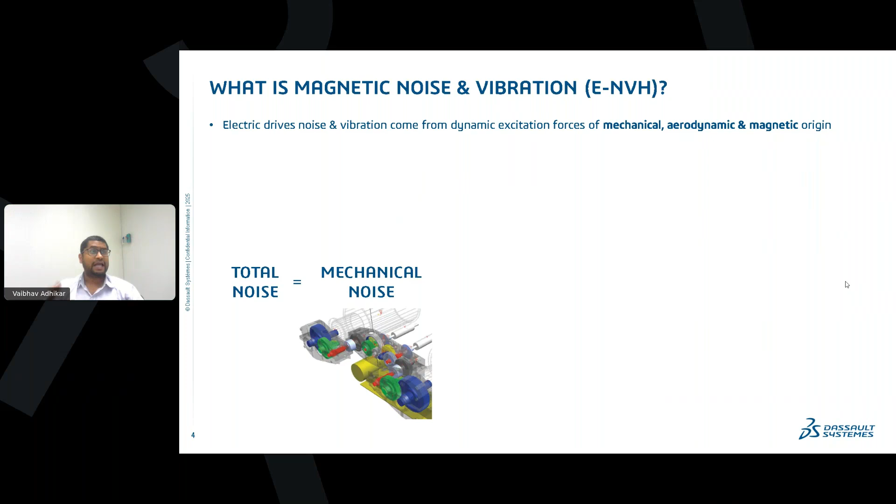So what exactly is the e-NVH? What we observe physically is the total noise. But I can decompose this total noise into three different components. The first component could be a mechanical noise, maybe because of the structural interaction. You can see a gearbox can be one of the examples. Okay. Another component could be the fluid noise. Here you have the structural and the air interaction, so the fluid as well as the solid interaction is a crucial part to get the noise level. And the third component we might ignore many times, and it is not physically realizable. So that is the magnetic noise.

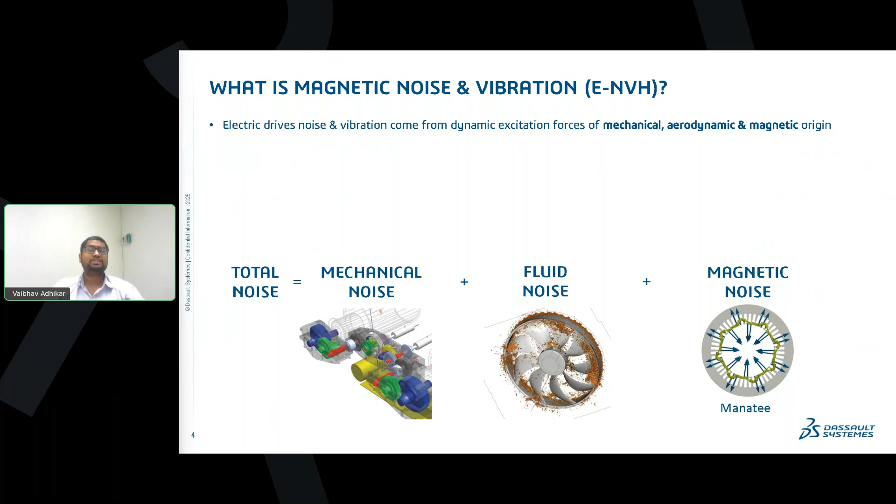So magnetic noise basically comes from the forces, magnetomotive forces, and these magnetic forces are basically induced by the magnetic fields, and these magnetic fields may be present in the coils or in the magnets, which are again an inherent part of your motor.

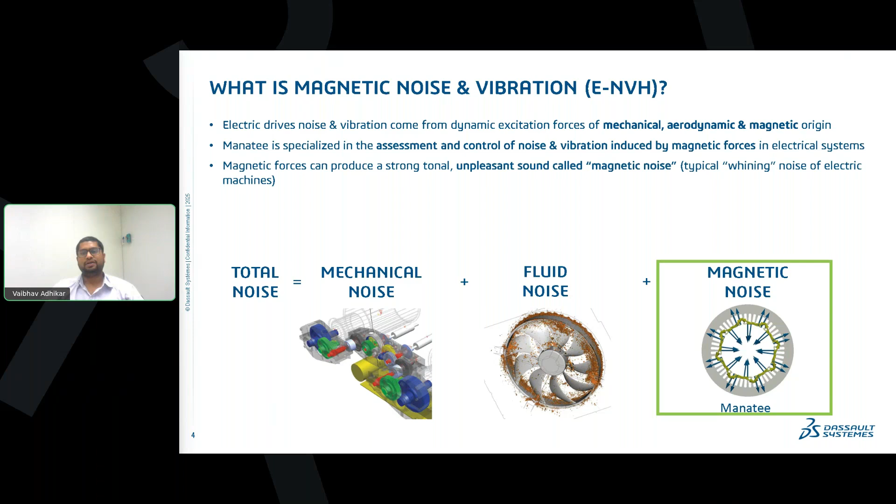So if you are dealing with a motor or generator, any rotary machine system, magnetic noise will always be there because of the magnetic forces, and those magnetic forces basically get induced by the magnetic fields. And Manatee is a very specialized tool to assess this magnetic noise and the vibration which is basically induced by the magnetic forces. These magnetic forces can produce a strong tonal, unpleasant sound level, something we also call magnetic noise.

So, having said so, why do we really care about the magnetic noise, which in automotive terminology is also known as e-NVH? Of course, the first answer is the end user expects the electrical system to be as silent as possible. However, the magnetic noise can be louder than your aerodynamic noise or your mechanical noise, and there are multiple reasons we want to reduce this noise. If I list down these reasons, one could be fulfilling the standard requirements. Another could be you may want your product to be different from the competitors, or you may want the product to sound better compared to your competitors.

You also expect that the product should not get rejected during any subjective testing, as the product is lifelong. Its lifetime should not be reduced because of these vibrations. And of course the product must not disturb any surrounding life. So there are multiple reasons why we need to address and mitigate the e-NVH noise.

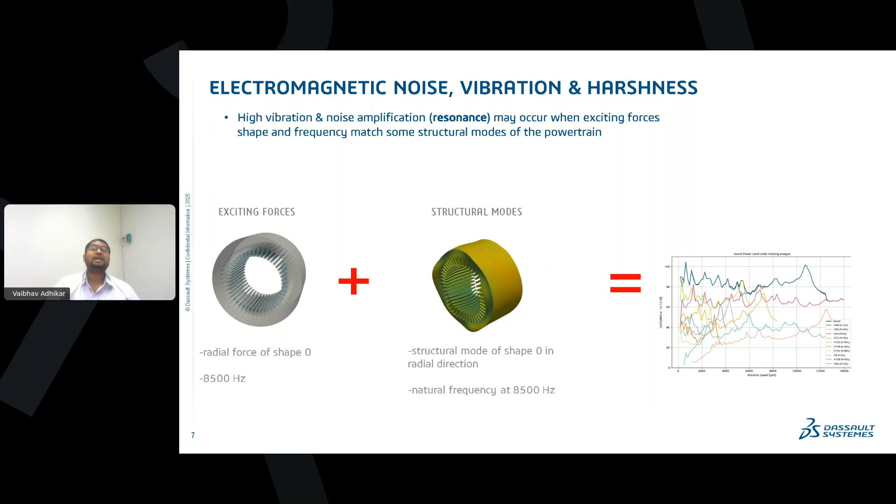Now, on top of it, we also have the structure. This structure will also have its fundamental modal shape. Here you can see another structural mode, and it is also expanding and compressing in the radial direction, at the same frequency, 8.5 kilohertz. So if both these conditions are matched, that results in resonance. I will repeat: if the mode shape from the electrical point of view and from the structural point of view match along with the frequency, that's where the resonance condition gets satisfied, and you will see a sudden spike in your noise levels. That is something we definitely need to identify, and we need to resolve that resonance.

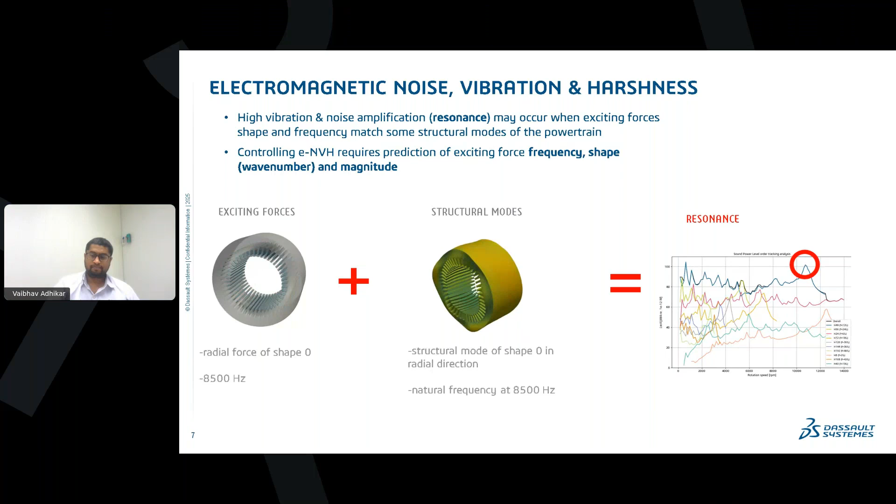Now, from this resonance concept, we came to know that in order to control your e-NVH noise, we should have control over, or be able to predict, the force frequency, the shape, as well as the magnitude of it. And let's see how Manatee can help in this.

Now, you might have observed that this is a multiphysics process where the electromagnetic forces as well as the structural motion combine, giving you the e-NVH noise. So it is a multiphysics process, and here not only the electrical engineers but also the control engineers, mechanical engineers, or the NVH engineers work together to address this problem.

Maybe the control engineers or electrical engineers will work at the excitation level, whereas the mechanical engineers and the NVH engineers work at the transfer path, addressing the structural or the acoustic issue. So all needs to be solved in a single user interface, and that's what Manatee is providing.

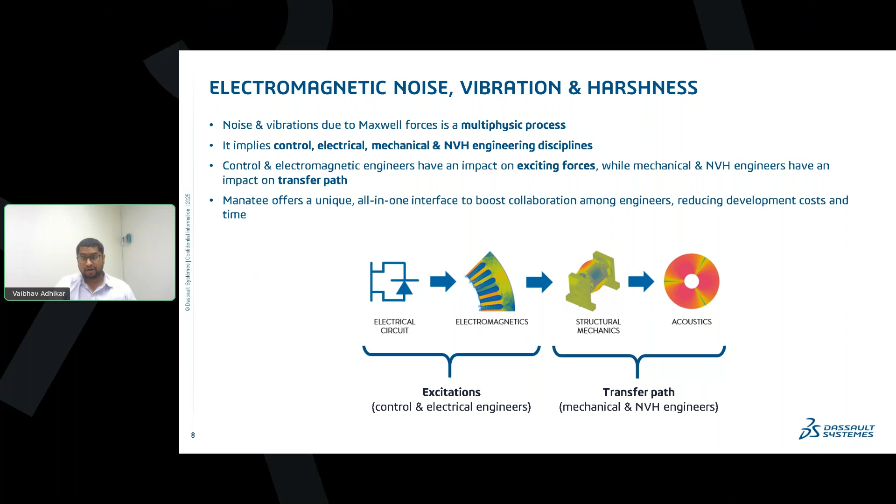So Manatee offers a unique solution, an all-in-one physics solution to address the e-NVH problem, where all the engineers can collaborate among themselves. Multiple teams can collaborate to reduce your development cost as well as time.

Not only this, Manatee also has predefined simulation workflows, and the fast and accurate simulation results will help you analyze the root cause of the e-NVH problem, and there are inbuilt mitigation techniques to reduce these e-NVH levels.

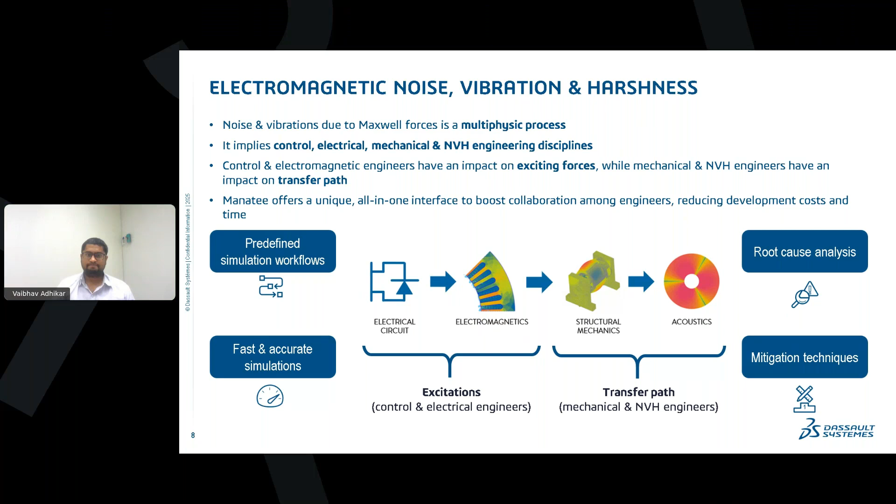Manatee has a wide range of experience addressing these e-NVH challenges. Manatee was initially developed by EOMYS in the north of France, and they have already served more than 170 industries to reduce e-NVH levels by almost 40 dB.

Manatee has a wide range of experience in supporting various topologies, whether it is the permanent magnet synchronous motor or your asynchronous motor, like induction machines, squirrel cage induction machines, or wound rotor synchronous machines, or even generators. Your rotor can be on the inner side or the outer side.

And of course, a wide range of applications, whether it is from watt to megawatt, or from 5 rpm to 150 kilo rpm, you name it, we have the experience in the given industry.

In particular, if I talk about the different industries, when it comes to the transport and mobility industry, all the electrical traction motors, electrical pumps, steering motors, or high voltage AC motors face e-NVH problems, and Manatee is a great tool to address that issue.

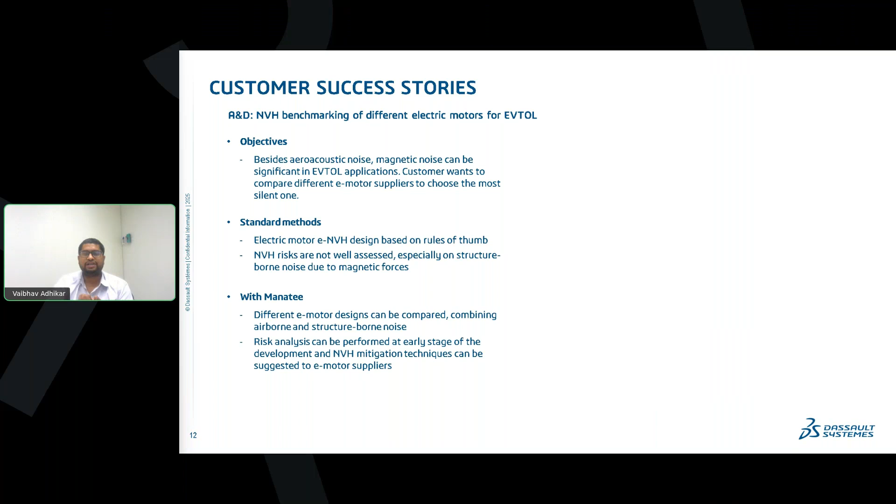And with Manatee, how were they able to address the problem? They compared the different motor designs systematically, and they addressed both airborne as well as structure-borne noise in a single solution. This enabled early stage detection of the NVH level, as well as mitigating it.

Here you can see, for example, these two motors. The 24 slot, 28 pole outer rotor has less noise level as compared to the 12 slot, 14 pole outer rotor.

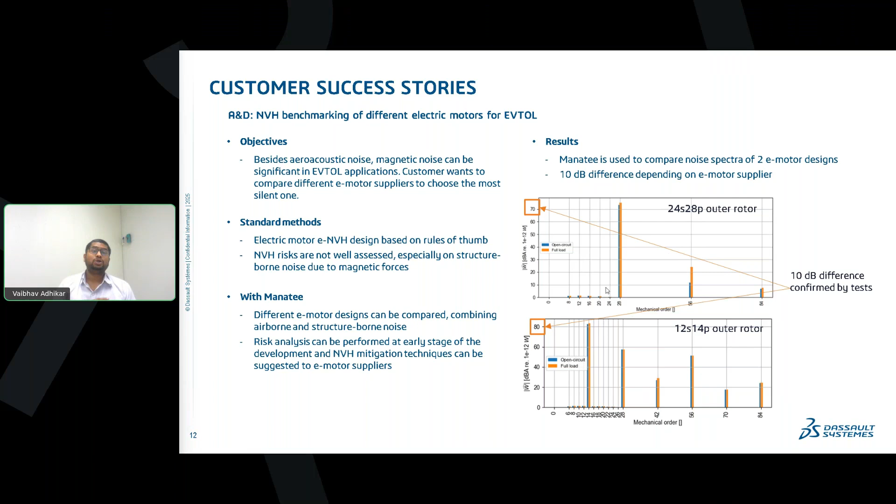So with this systematic study, those who basically rely on the vendors to get the motors can definitely make use of Manatee to compare different designs at a very early stage.

Another example here I have from the transport and mobility sector. Here, the noise was coming from the low speed RPM, and that was identified during the testing. In their current practice, in order to resolve the e-NVH issue, they often carry out the trial and error approach, which may incorrectly scale your past experience to the new design.

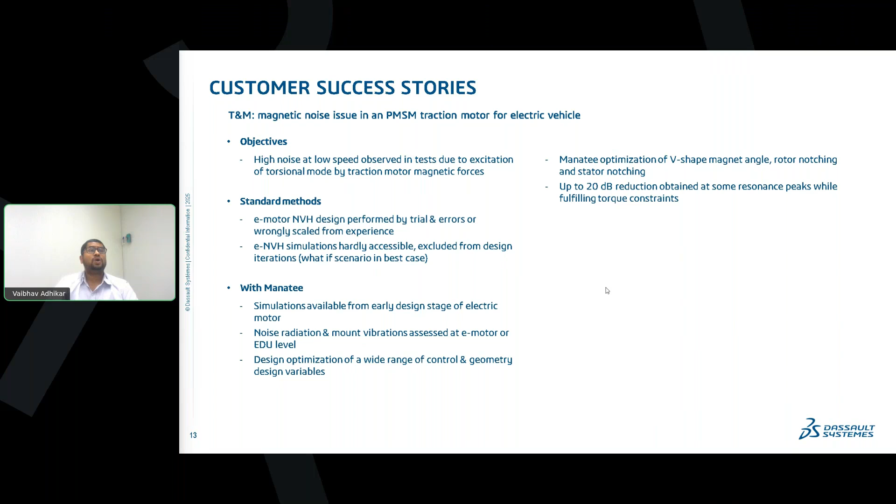And e-NVH simulations are typically difficult to access, and therefore the regular design iterations as well as the what-if scenarios had limited access to address such e-NVH levels. And with Manatee, they were able to do the simulation at a very early stage of the design, and they not only predicted the noise of the e-motor, but also, when the motor is mounted on the EDU, how the noise level will be. So those things they were also able to predict.

And by making use of the Manatee optimization, which is again inbuilt functionality of Manatee, they changed the magnet angles, rotor notching, as well as the stator notching. And you can easily see the resonance has almost reduced by a 20 dB factor by redesigning the motor. So that's how the customer has used Manatee in the past.

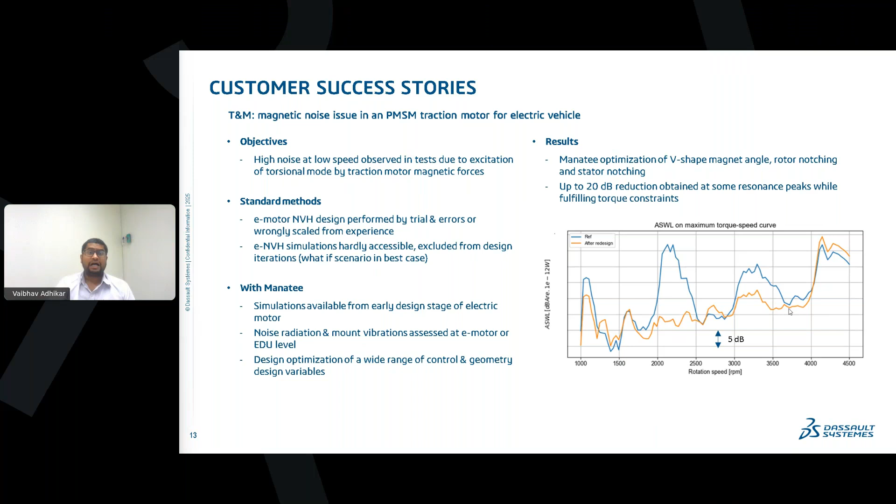Having said so, let me focus on the next part. What are the inputs and outputs that Manatee will require to set up your simulation problem and to access the various results? Till this point, you might have understood Manatee is bridging the gap between your magnetic circuit, electrical circuit, and your structural circuit, and predicting the acoustic noise and the vibration that arise because of the magnetic forces.

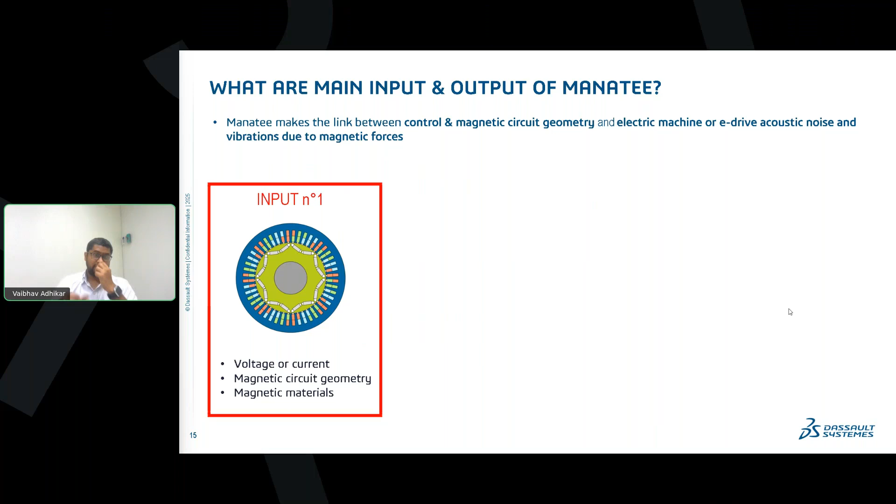And while considering this, there can be multiple inputs you can consider. From the electrical perspective, you might want to have the voltage or current levels, the magnetic circuit geometry, as well as the electromagnetic material properties of your electrical machine. The next level could be to have the modal basis of your electrical drive. This input is optional, meaning if you want to go towards higher accuracy, you should include this electric drive modal basis in your simulation.

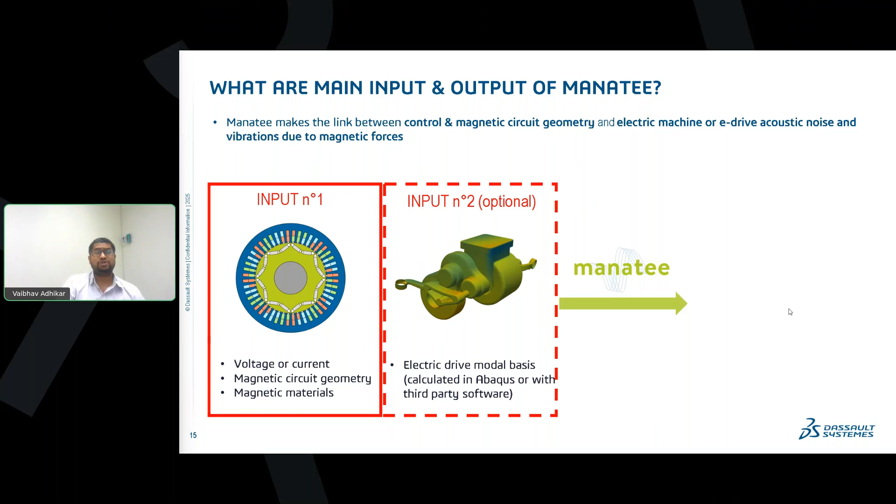Once you give these inputs, Manatee will give all the results, such as the electrical, magnetic, structural, and acoustic quantities. The root cause of the resonance you will be able to identify. Then the single speed, variable speed, torque, as well as the speed plane you will be able to observe as an output. So all the key quantities such as the current, flux, and forces are available as an output in Manatee.

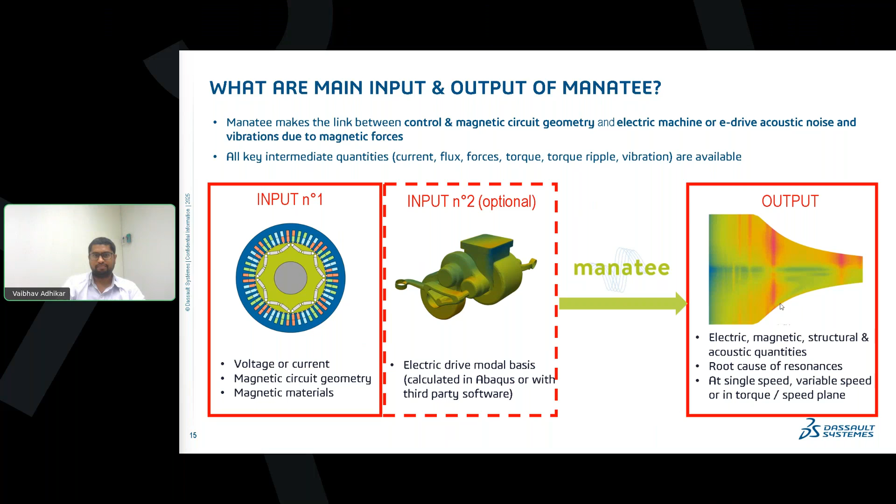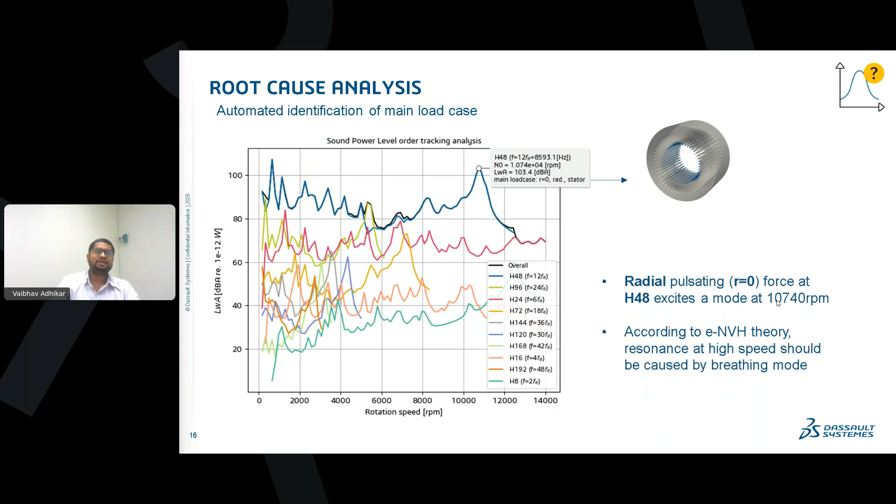The highlighted one is the H48 mode, and the main load cases are the R equal to 0, the radial and stator contribution of the R equal to 0 forces. That is nothing but the pulsating forces. And according to e-NVH theory, the resonance at these speeds is because of the breathing mode, as we are highlighting here.

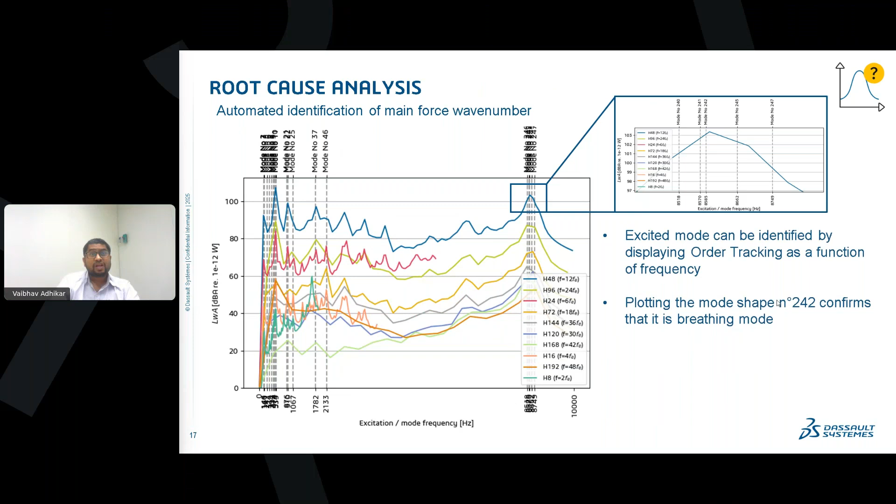Not only the sound power level versus rotation speed, but also the sound power level versus the modal frequency graph will be readily available. And this modal tracking will help you identify which mode shape is contributing. Here in this case, mode number 242 was closely resonating with the breathing mode that we are highlighting here.

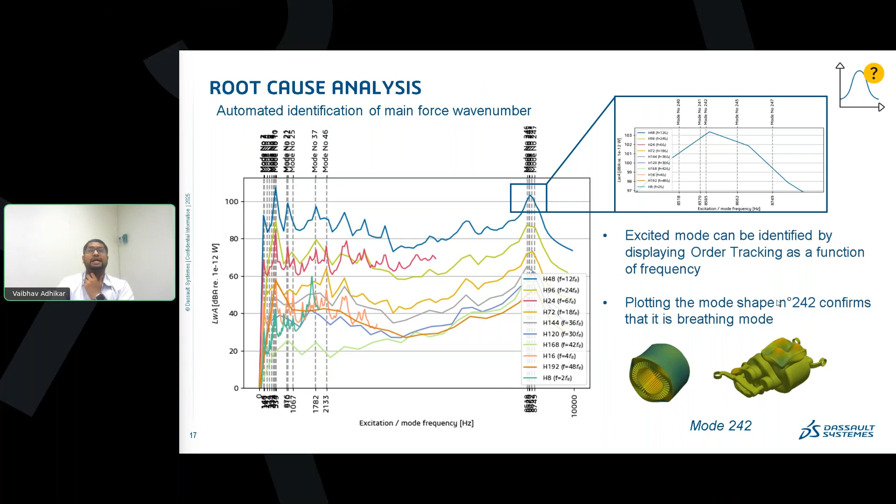Once you identify this, you may want to take preventive action and mitigate the noise levels. There are multiple things, such as the parametric sweep or the optimization, available in Manatee to mitigate your e-NVH noise. And there are already 15-plus predefined e-NVH mitigation techniques, which very minimally affect your efficiency level, but at the same time drastically reduce your e-NVH levels.

When it comes to electrical engineers, they may explore options such as changing the slot pole number, changing the stator notching, coil pitching, or the pole shape. Similarly, another technique is the rotor notching. In the upcoming slide, I will highlight these techniques.

Not only electrical engineers, but controller or mechanical engineers can use different techniques to mitigate e-NVH levels, such as damping, mode shifting, or tolerance control. All these techniques, which are already available in Manatee, negligibly affect your torque and efficiency. So you can definitely use these techniques to reduce your e-NVH level.

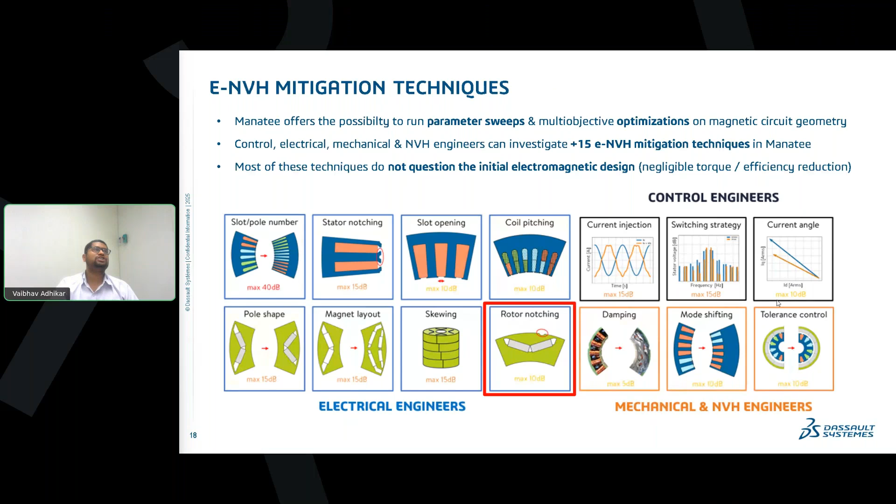One such example is the dual notch technique. Here I have introduced this rotor notch, and I can make it a parameter. The angle between these two notches could be my parameter. So maximum it could go till this part, and minimum could be this.

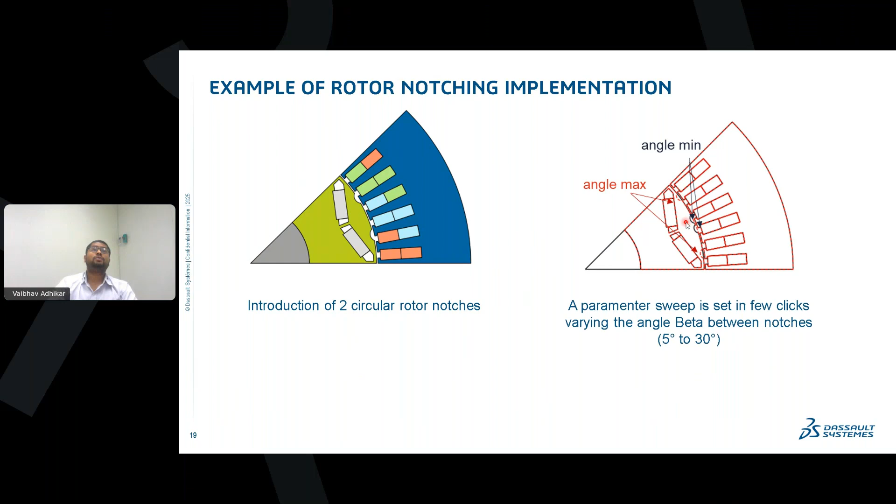For this variation, I can do a parametric sweep, maybe from 5 degrees to 30 degrees. Once I complete this simulation, for the motor where the notch was not present, the sound power level has been reduced from almost 105 to almost 90 dB. So almost 15 dB or 14 dB of reduction was observed.

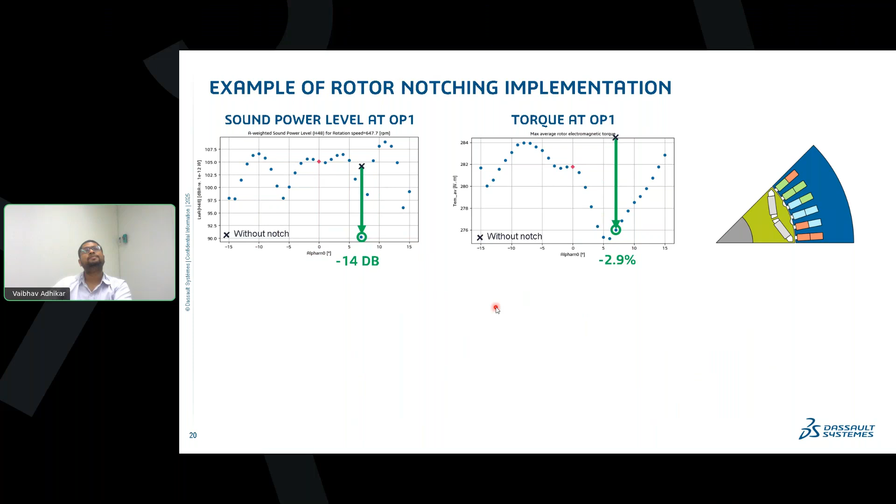This reduction occurs with introduction of a notch at an angle between 5 to 10 degrees, somewhere close to 7 degrees. Similarly, if you observe the torque at that operating point, you can see it is minimally affecting the torque—reduced by almost 3%. So this angle separation can definitely be a good choice to reduce your sound power level while maintaining your torque requirement.

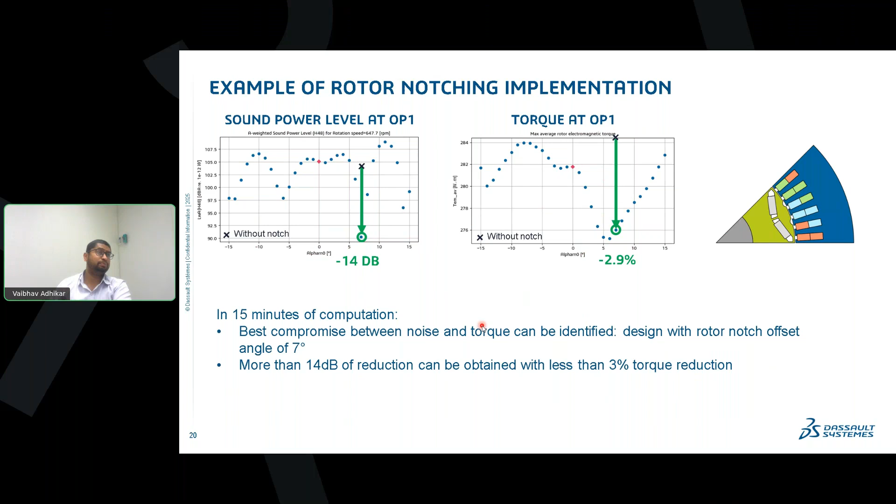This parametric sweep was computed in just 15 minutes. When setting up the problem at each stage, machine definition takes almost 10 minutes, variable speed and computation again takes 10 minutes, and result analysis takes 10 minutes to half an hour. If you go for corrective measures, the parametric sweep and optimization will come into the picture, typically taking from 10 minutes to 3 hours.

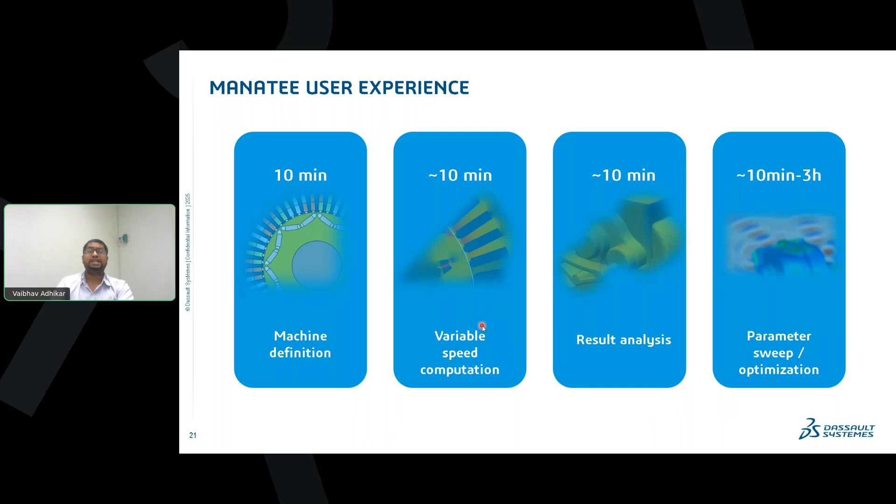So addressing and identifying the noise, as well as mitigating the noise, is definitely a half-day job with Manatee, and that too with a user-friendly GUI. Let's see how I was able to set up the model. First, I identified the problem, and then I introduced the notch to mitigate that level. So let's go into a small demo.

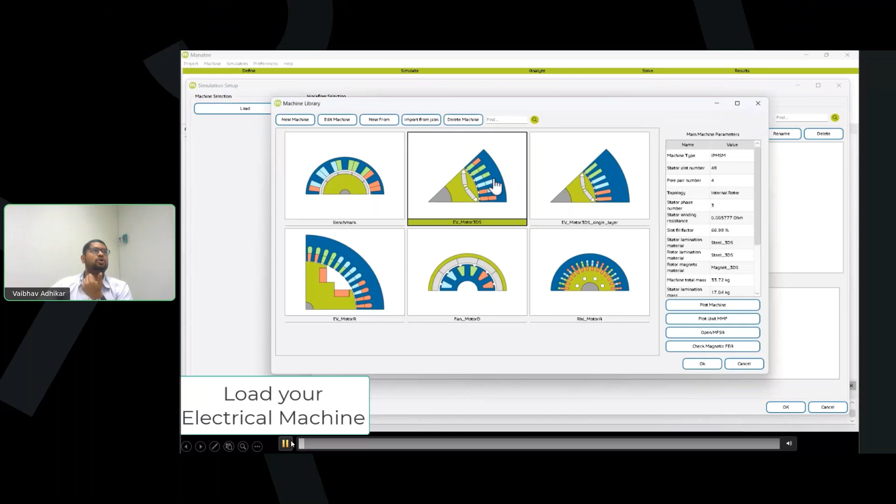So here you can see, if I turn it on—yes. Here I'm loading my machine, that is an internal permanent magnet synchronous motor, and I'm solving the workflow. This workflow is variable speed, sinusoidal current excitation, and I'm solving the multiphysics problem.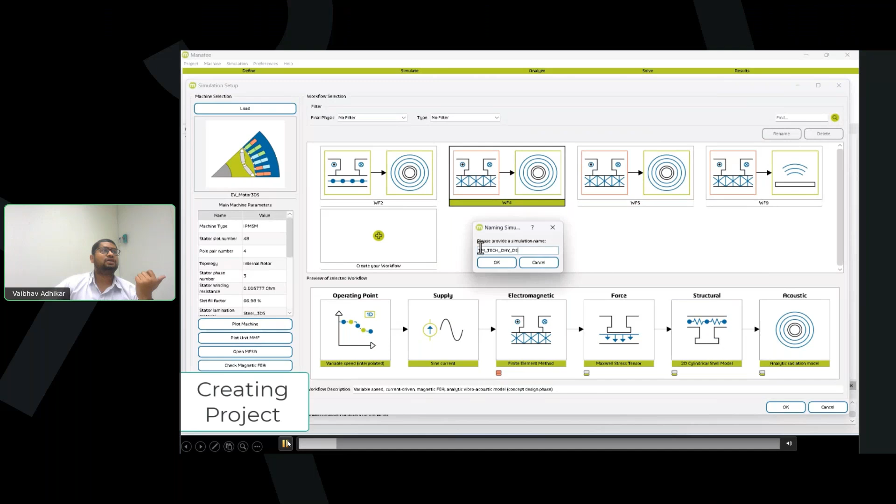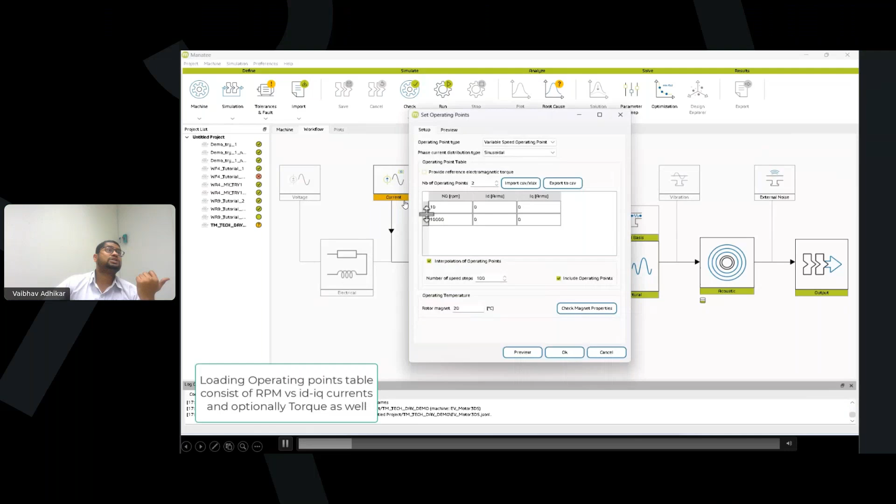Yes, so I'm solving the multiphysics problem. Here I'm giving the workflow name, and the green box is where I need to specify my inputs. The current is basically my input—the RPM versus the Id, Iq value acts as input here—and I'm loading it and doing the variable speed analysis for the given motor.

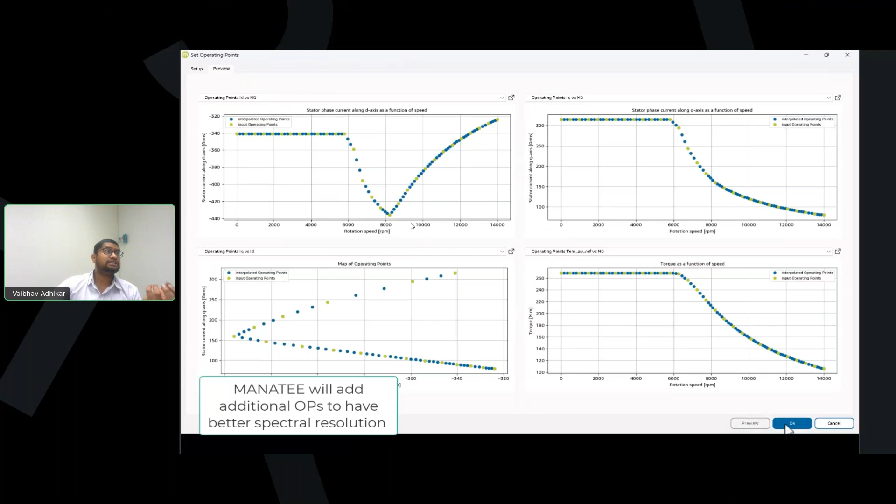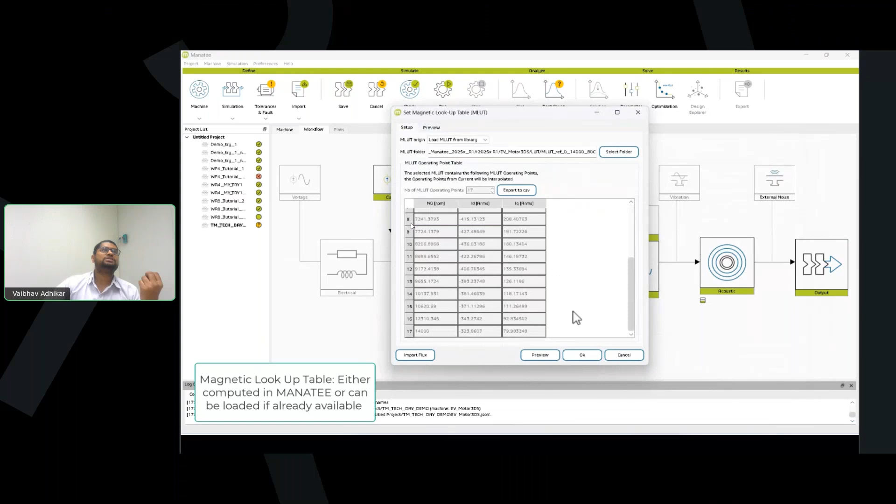I can also visualize the results. On top of it, the magnetic lookup table will be computed. For each operating point, we map the magnetic properties and prepare this magnetic lookup table. Either you can compute it in Manatee, or load it if already available.

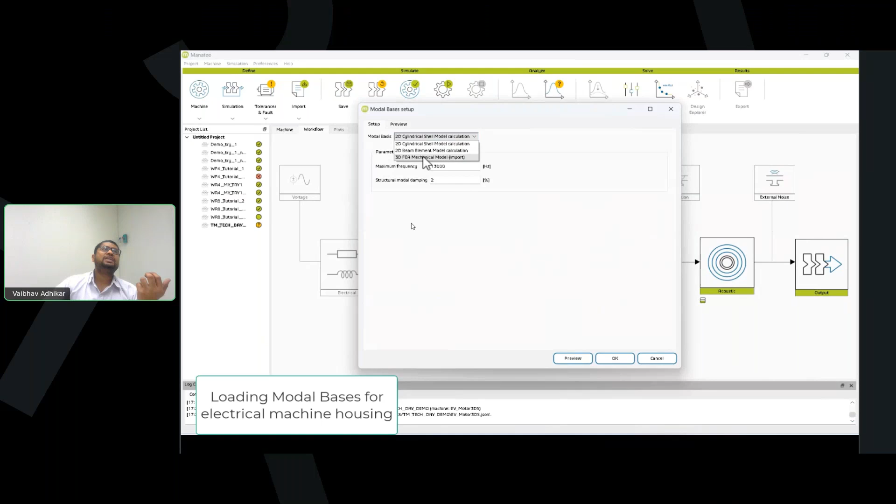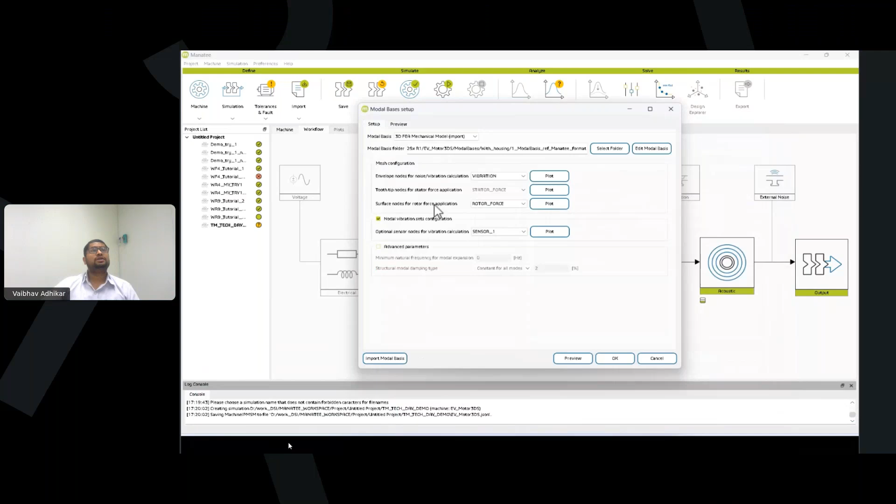To have a more realistic approach, I'm selecting the modal basis from Abaqus, let's say, that too in Manatee file format. So I'm loading my electrical housing, and this is the housing you can see.

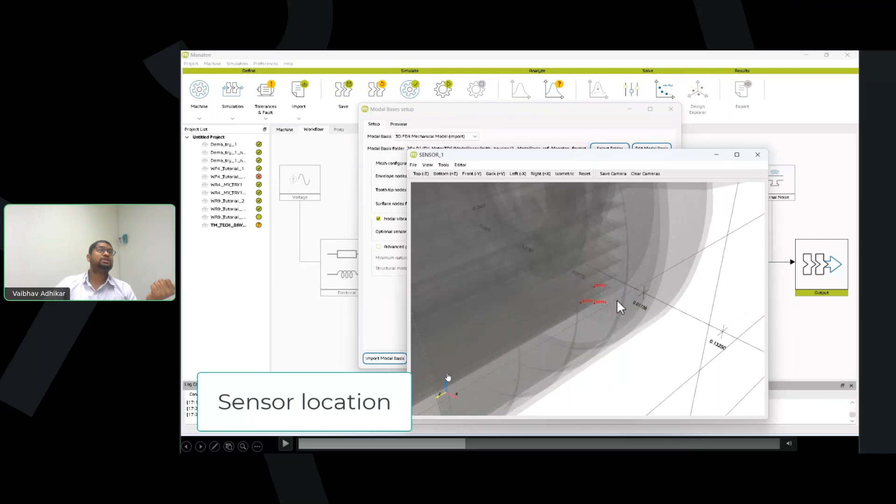I'm also considering the modal basis, the structural analysis in this simulation, which has been done outside. Of course, you can also compute a fully analytical or semi-analytical structural simulation within Manatee. You can then define the sensor location where you would like to measure the vibration levels—all of this has been defined here in the modal basis.

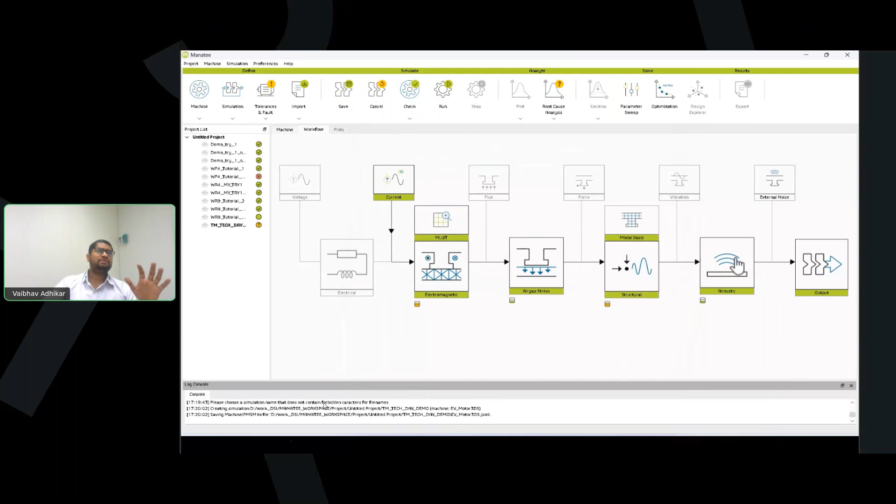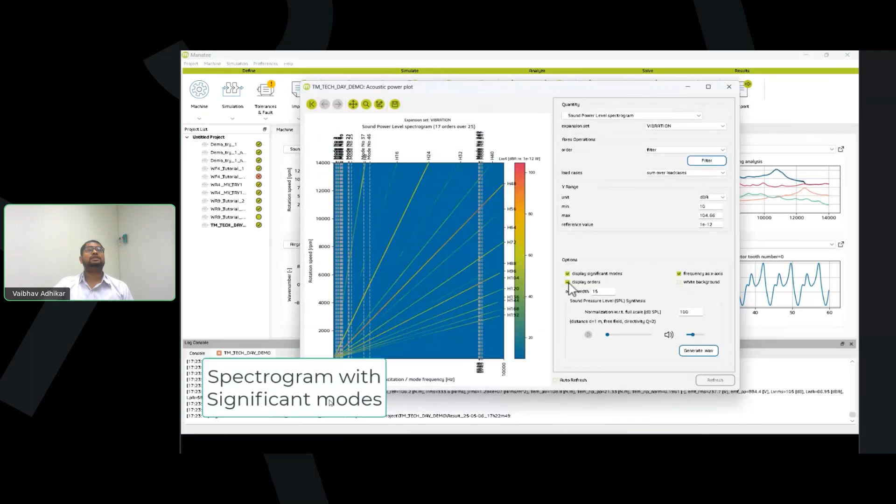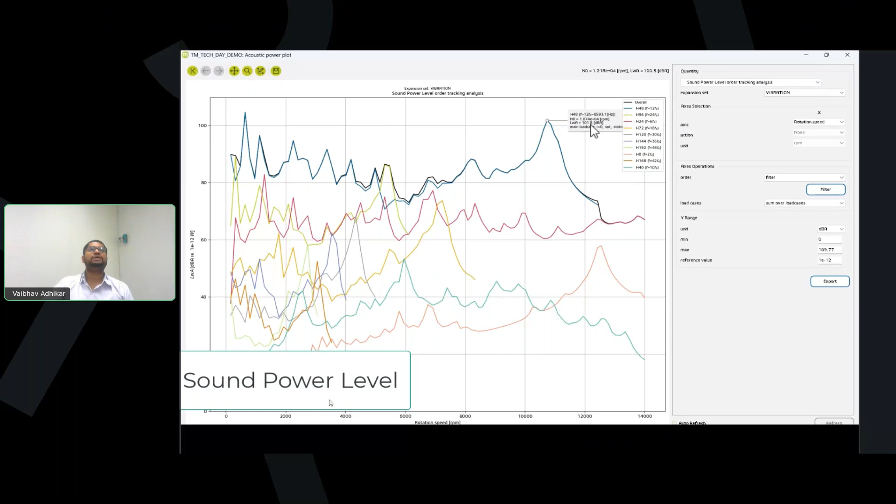So now I'm set up with the model for the given machine. I will run my simulation, and within 5 to 10 minutes, this multiphysics problem will be solved. Here I'm plotting the spectrogram, and you can see the significant modes. I've also highlighted the resonance condition, and here at the higher RPM, you can see the sound power level is almost close to 101 dBA, and that too at 1000 RPM.

Sorry, the 10,000 RPM speed. If I back calculate the current levels, I can use that current point to modify my design.

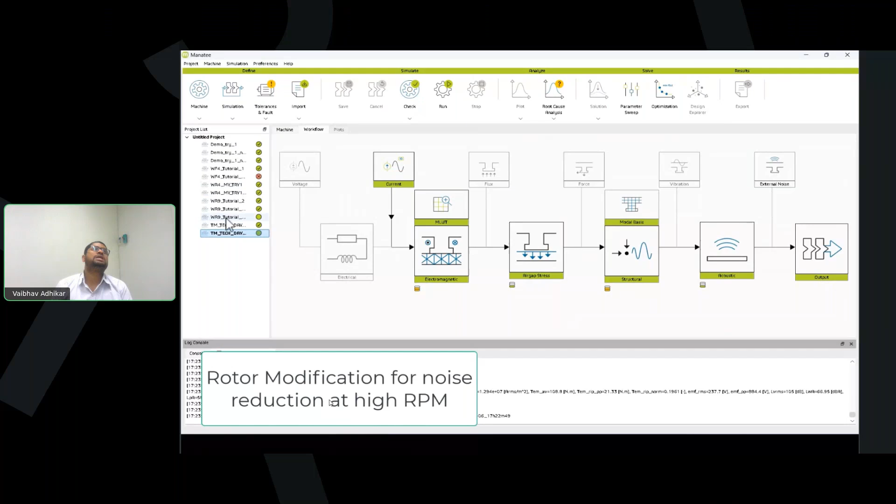So here, to reduce that noise level at that particular RPM, I'm introducing the notch like I was highlighting. You can easily select the notch and set up whether it is the dual notch or single notch. All these setups I'm doing here, I can specify the parameters, and this is my modified motor now.

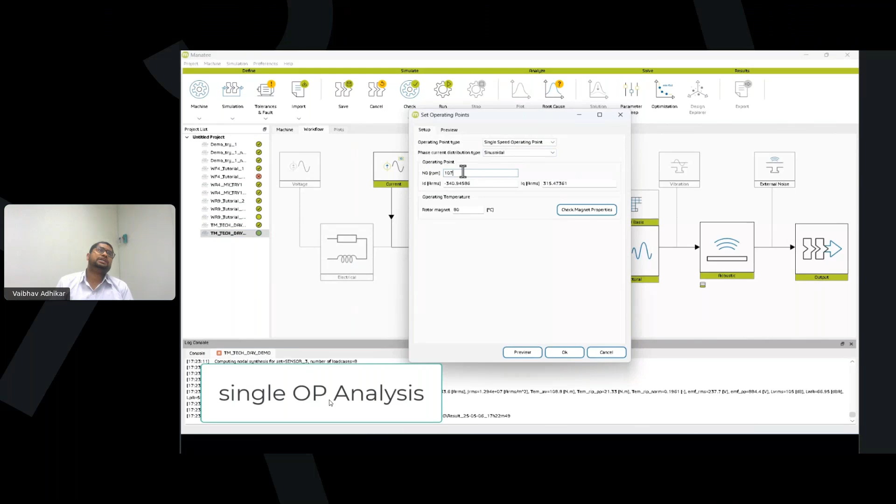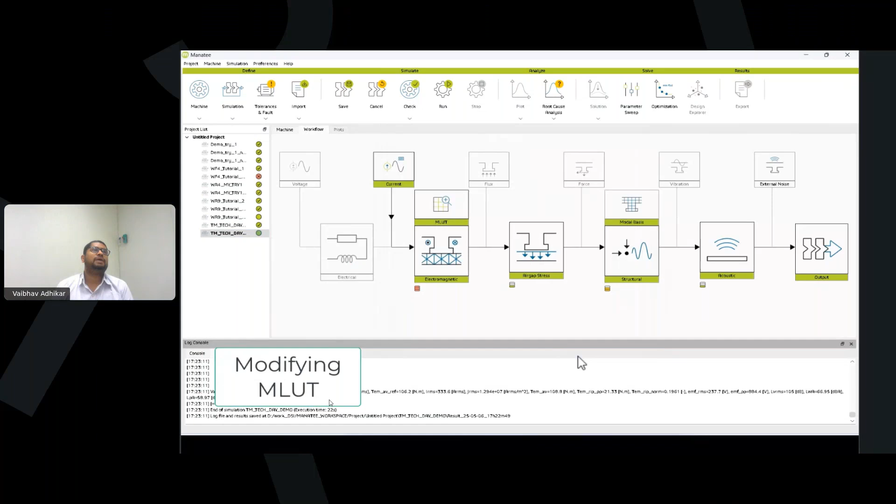And for these notch designs, I will do the parametric sweep. Of course, I may be interested in sound power level at a particular RPM only, not the variable speed RPM. For this point of time I can compute my magnetic lookup table, and I will set up my parametric sweep, that is the angle

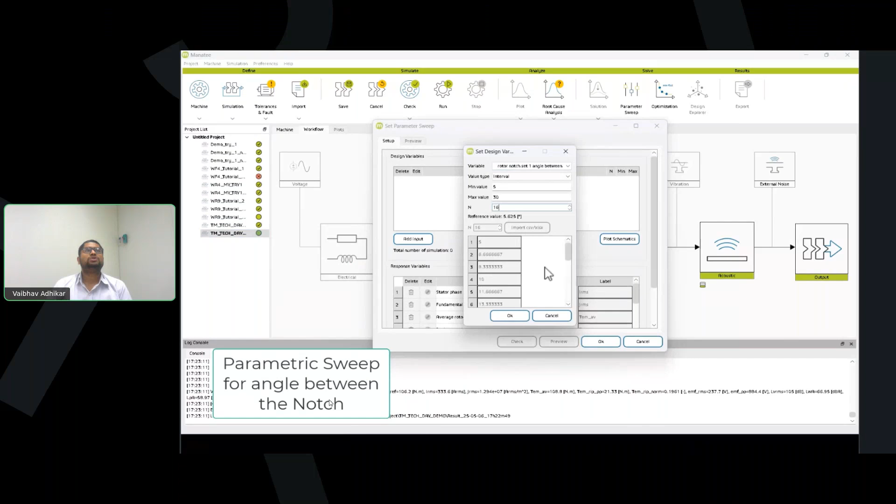between my notch. So maybe from 5 degree to 30 degree, in almost like 16 samples that I have considered, and I'm solving my model.

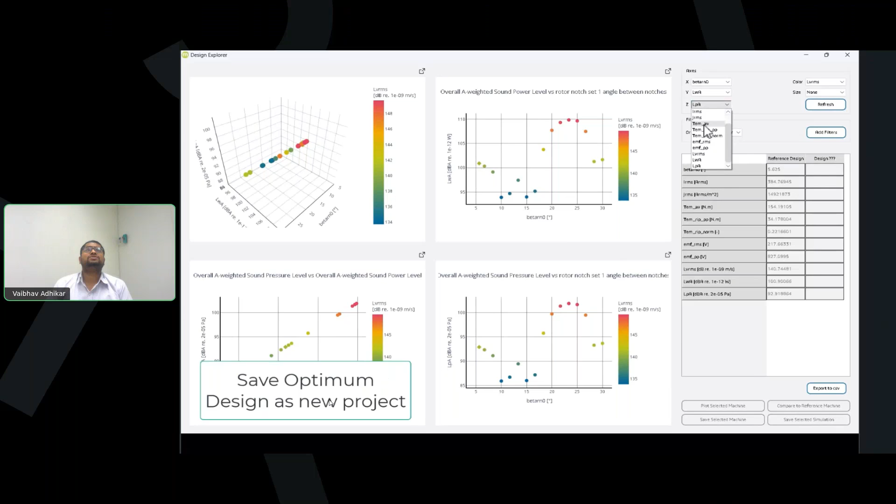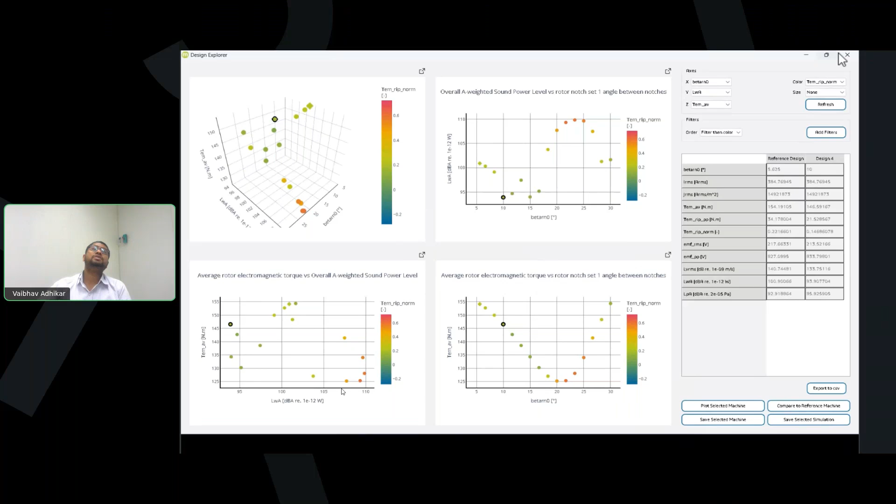And you can definitely compare the noise power level as well as the torque level, and you can choose the optimized design. Here is design number 4, which basically gives me the optimal result, where I'm drastically reducing my e-NVH, at the same time with minimum change in my torque value.

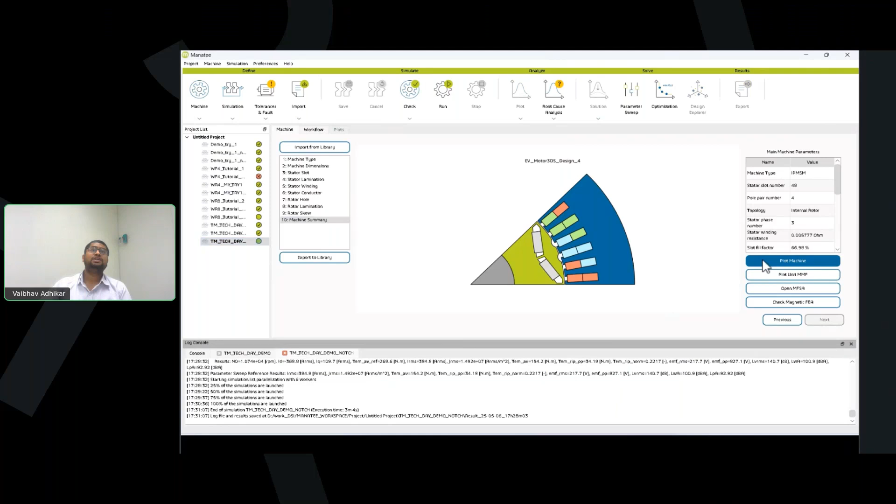So this design I have already considered. I will consider this as my final design, and to ensure everything is working fine in all other regions also, I will again rerun my simulation for the variable speed.

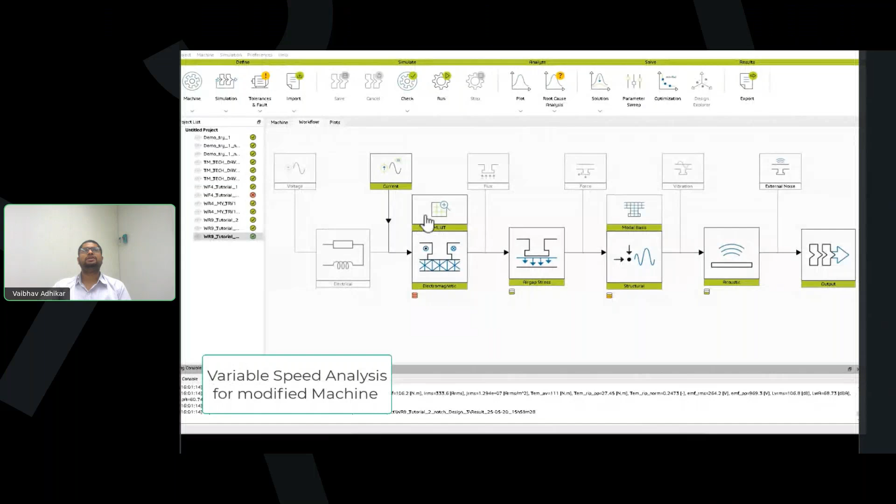And once I run that variable speed, of course I can compute my magnetic lookup table again for the new machine, and I will solve my problem.

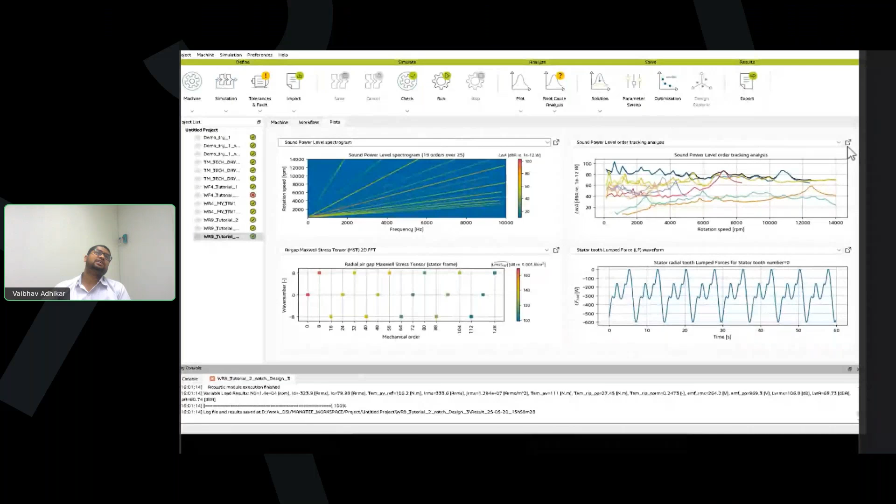So again, this entire process has basically taken almost like half a day, and I was able to identify as well as mitigate the noise level at the higher RPM from 101 dBA value to almost like 87 dBA value in this particular example.

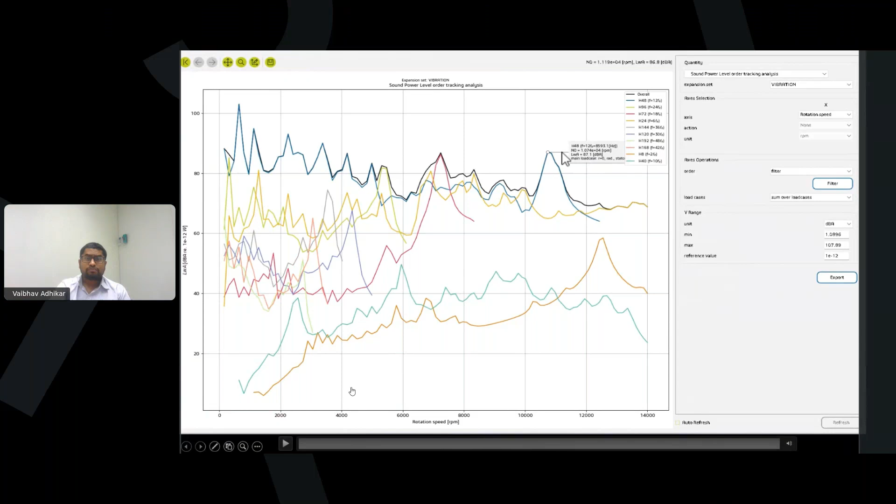So that was the short demo, and of course you can have different inputs at different levels. The different optional inputs are available to help you out, and Manatee has synergy between all the different Simulia products that are available, such as, let's say,

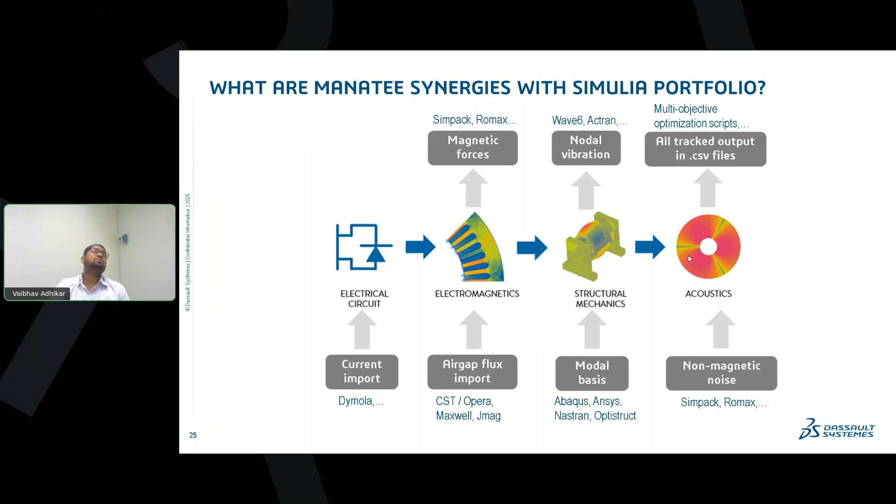you may import your air gap flux computed from CST, you may calculate your modal basis from Abaqus, or maybe your non-magnetic noise in SIMPACK and other softwares. So at various levels you can have the output levels so that you can have communication

between the existing softwares. When it comes to the licensing, you can easily see that I have the node lock as well as the floating license available. These are compatible with batch mode, so that you can call Manatee from third party scripts if you wish to.

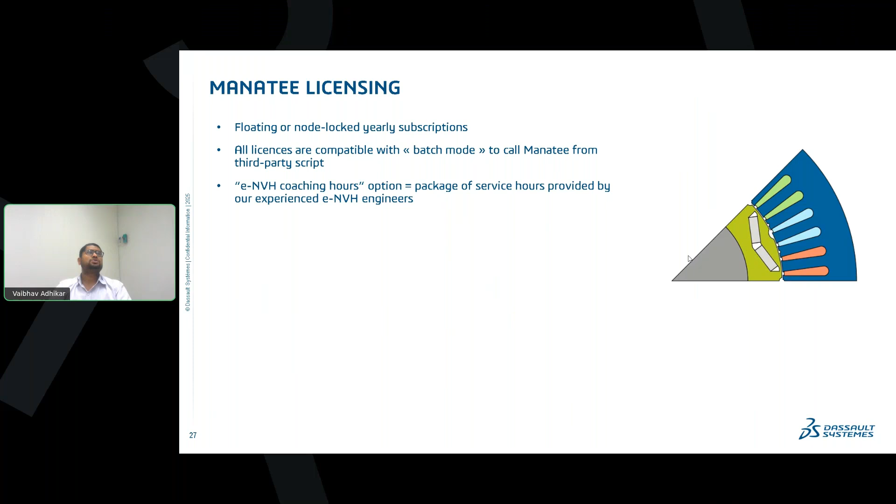Of course, if you have Manatee, you are also eligible for the optional e-NVH coaching hours, where our experts of e-NVH will definitely give service hours to provide and share their experience with your team.

So with this, I would like to conclude my session. Manatee definitely removes your e-NVH simulation bottleneck in the electric drive virtual prototyping workflow. It provides an efficient workflow to assess, analyze, and minimize the noise and vibration level due to the magnetic forces.

And you can check all n number of what-if scenarios as well as the optimization techniques that can be carried out by whether it is the electrical engineer, the structural engineer, or the NVH engineer. So they need not be the CAE experts.

And as in the demonstration I was showcasing, Manatee is way faster than all the commercial tools available in the market. It is almost like 1,000 times faster to solve and address your e-NVH simulation.

And of course, you have the standardized interface, and there is e-motor integration and collaboration between Manatee GUI with other software as well as within your team. And the GUI is very ergonomic in nature, very user intuitive, so that you can give it a try. So with this, I would like to conclude my session.